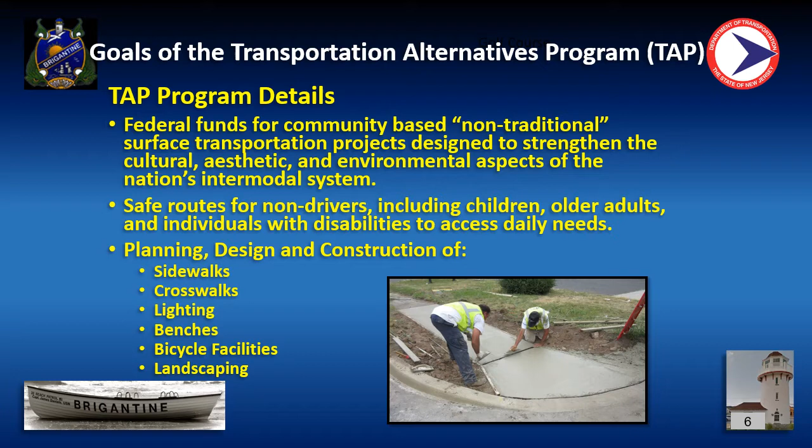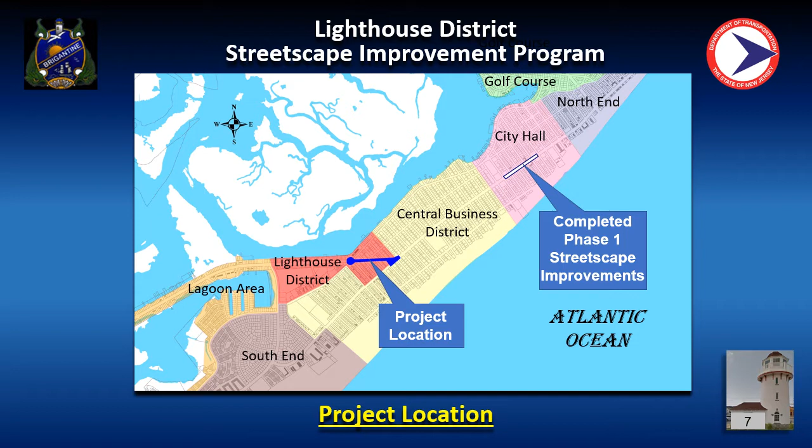Bayshore Avenue runs along the northwest side, or the bay side, of the island, and this roadway intersects Brigantine Boulevard at Lighthouse Circle. Brigantine Avenue runs along the southeast, or the ocean side, of the island and meets Brigantine Boulevard at a triangular-shaped intersection near 30th Street. That's where everything ties together.

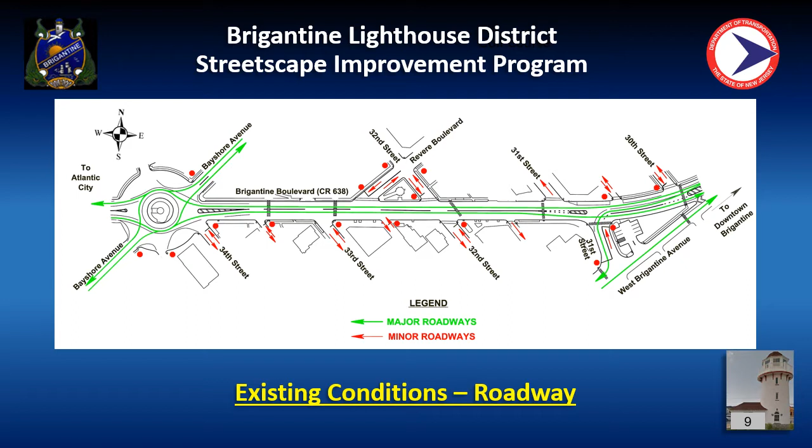Brigantine Avenue has bike lanes in both the northeast and the southwest of Brigantine Boulevard. The bicycle lanes currently do not extend along Brigantine Boulevard through the project area.

The major and minor roadways through the project area typically have sidewalks along both sides of the road, and crosswalks across Brigantine Boulevard are provided at 5 different locations, and this provides excellent pedestrian connectivity through the project area.

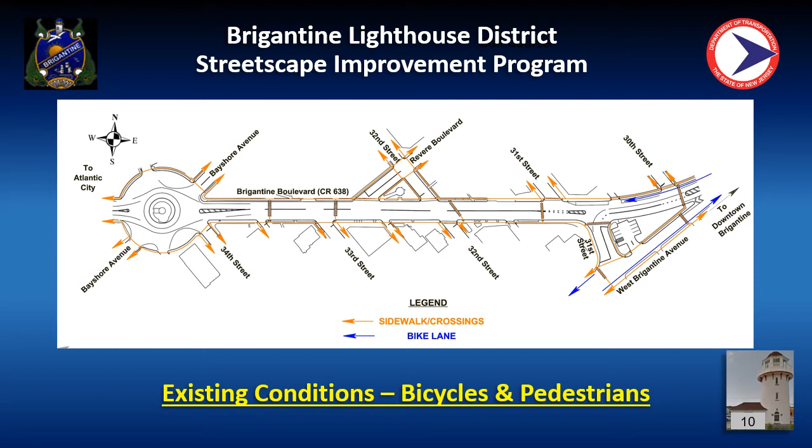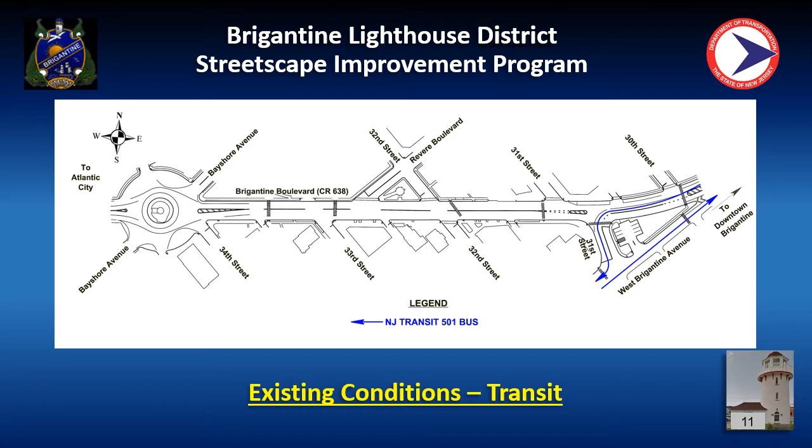The New Jersey Transit 501 bus runs the length of Brigantine and connects to Atlantic City. The bus route runs along Brigantine Avenue through the east end of the project area. The route has stops at 28th Street and 32nd Street in both the eastbound and westbound direction. The NJ Transit schedule also shows a stop at 30th Street in the eastbound direction; however, there's no sign showing the location of this stop. It'll be right about here.

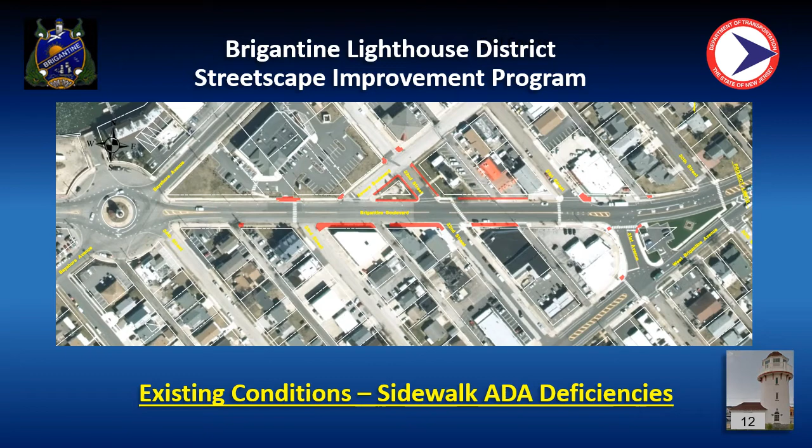The New Jersey Department of Environmental Protection, or NJDEP, regulates many activities in many areas within the state. For example, NJDEP regulates flood hazard areas, which are lands with a high risk of flooding. The entire project area is within a flood hazard area, where the 100-year flood elevation is 9 feet, and elevations within the project area vary between 3.5 and 7 feet. The entire project area is also within the Coastal Area Facilities Review Act, or CAFRA zone. NJDEP also regulates certain activities within a CAFRA zone.

The proposed improvements will have minimal environmental impact. The project team will determine whether the improvements require NJDEP review and will apply for permit approval during final design if it's required.

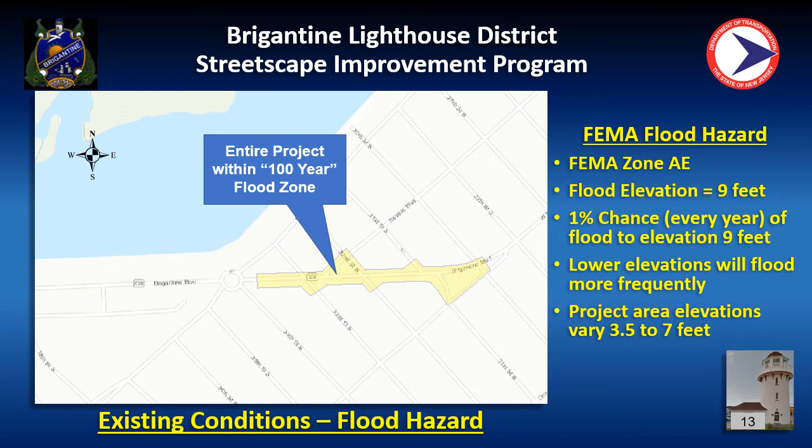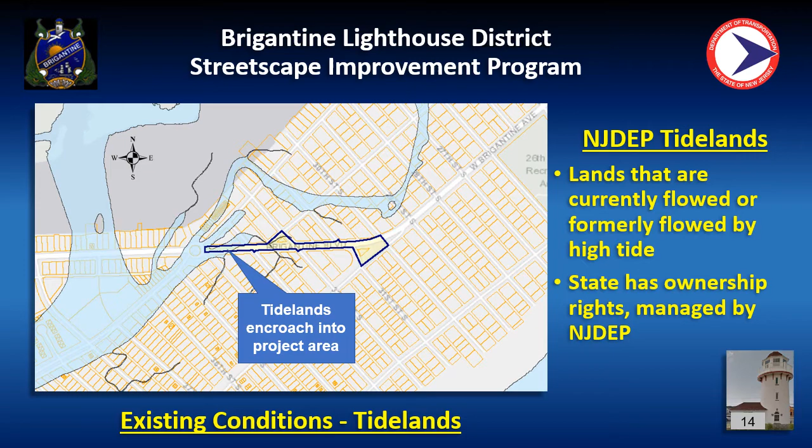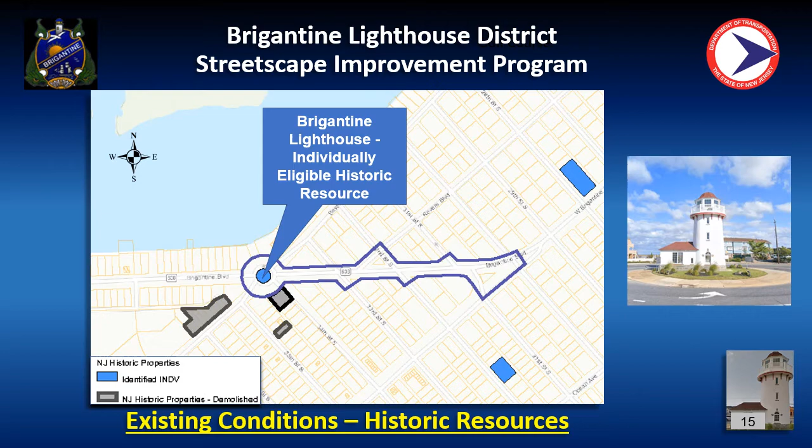The New Jersey Historic Preservation Office maintains a GIS online map viewer of the state's cultural resources inventory. The mapping application is called LUCY, which stands for Look Up Cultural Resources Yourself. The LUCY maps identify one existing cultural resource, the Brigantine Lighthouse, which is eligible for the state and federal registers of historic places. And of course, that resource is located right here in the middle of the circle, immediately adjacent to our project area.

Since this project will receive FHWA funding, the project will comply with federal requirements for minimizing impacts to historic resources, which is referred to as the Section 106 process. NJDOT will lead the Section 106 process, which includes the following: it starts with initiation, establishing the proposed improvements, and that's where we are right now. Also identifying historic resources, and so far we've identified one resource, the Brigantine Lighthouse. This is followed by assessing and resolving adverse impacts, if there are any. And throughout these steps, public input or consultation is requested, and everybody's invited to participate.

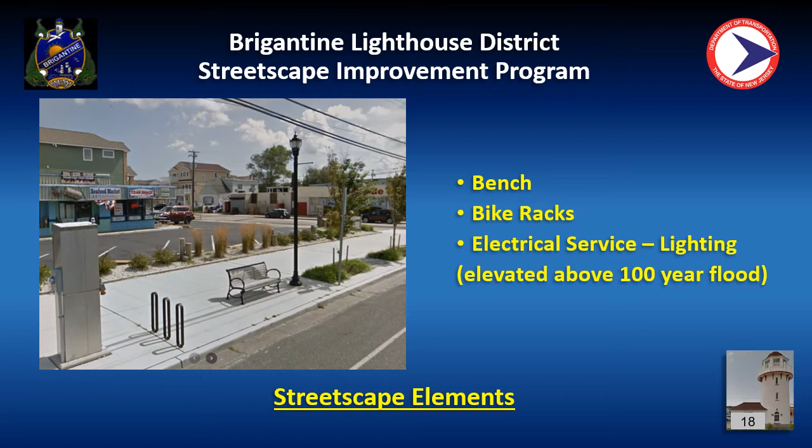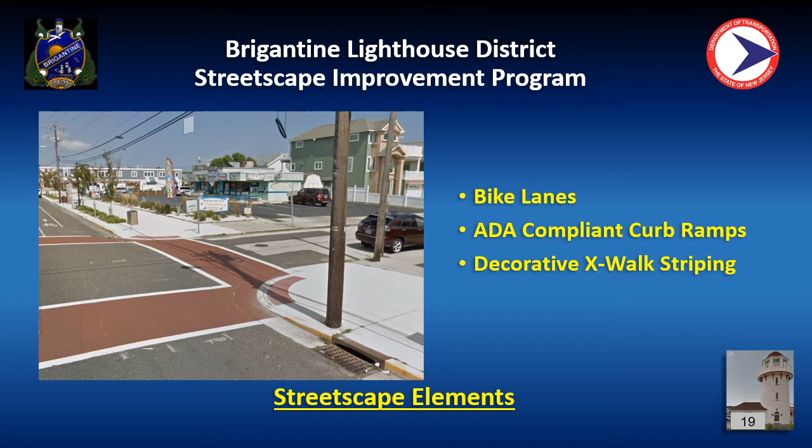Now let's look at the proposed streetscape improvements. The proposed measures are designed to improve the urban environment and better accommodate alternative users and alternative transportation modes. Streetscape improvements include various elements, including decorative lighting, landscaping, permeable pavers, and trash receptacles, benches, bike racks. Here's electrical service, and note the meter cabinet has been elevated above the 100-year flood. Bike lanes, ADA compliant curb ramps, and decorative crosswalk striping.

Landscaping is a significant part of the proposed improvements, with environmental benefits such as providing shade, reducing runoff, and improving the quality of the air and water, along with creating a natural and inviting space to encourage people to engage in social interaction.

Proposed street trees include white crepe myrtle and green vase zelkova, which will visually frame the project corridor, softening the viewshed and creating a visual definition between the roadway pavement and pedestrian areas. Ground covers include lily turf and dwarf fountain grass, which will fill in the planting beds and provide pedestrian level plantings. Now, this landscaping scheme is identical to the landscaping along Brigantine Avenue in the City Hall district, and would provide consistency between the two streetscaped areas.

Now, the project team would be open to suggestions for alternative plants if the Lighthouse District community wants landscaping that provides a contrast to the streetscape improvements in other parts of Brigantine. Any suggestions for landscaping alternatives should be provided to the project team on the survey form, which is available on the Brigantine website.

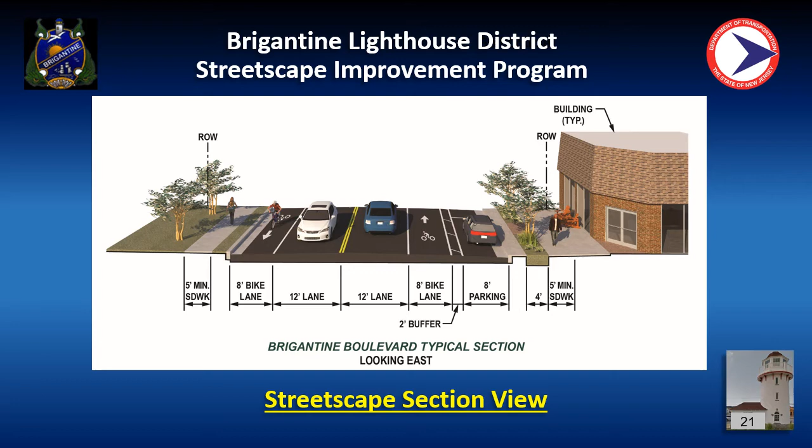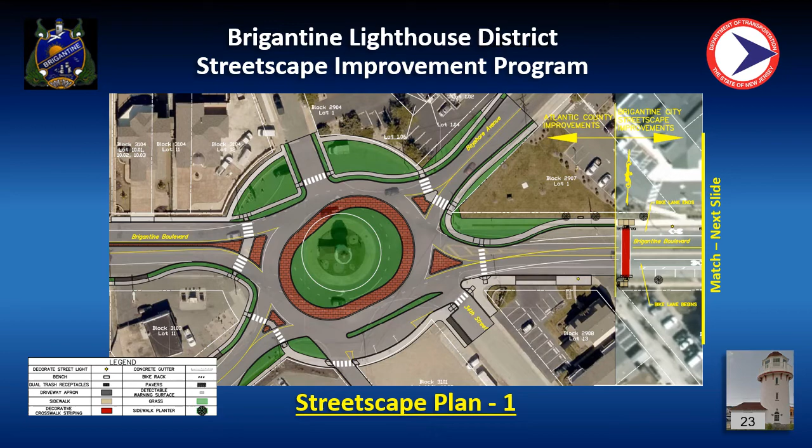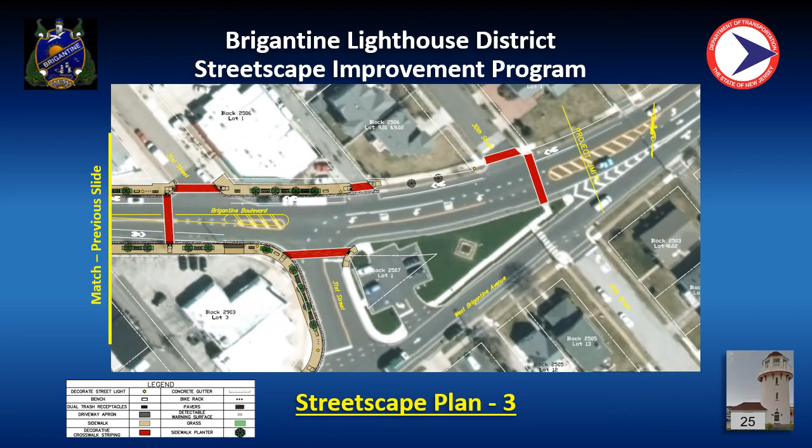The proposed streetscape improvements will provide the following benefits. They'll improve mobility for the young, the elderly, and disabled, encourage alternative transportation modes, provide health and quality of life benefits, reduce runoff and pollution, and provide shade. It will invite access to the district and to businesses, which should spur local economic activity, incentivize business investment, and increase property values.

Of course, these improvements will not be free, and there will be costs and impacts. For instance, the estimated cost is about $1 million, and this will be reimbursed through the federal TAP program. To construct the proposed improvements, workers will likely need temporary access to adjacent properties to tie in new sidewalk and driveway pavement. Temporary construction easements will be required for most adjacent property owners.

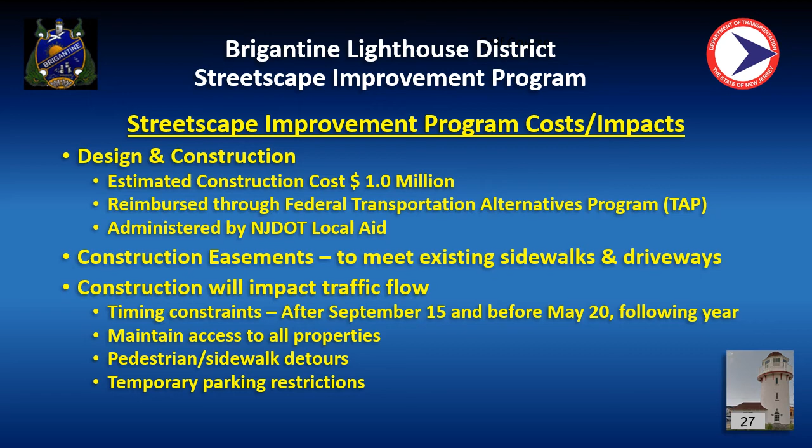These easements would be temporary, as permanent right-of-way acquisition is not anticipated. During construction, the contractor will need to close portions of the roadway and sidewalk to provide room for workers and equipment to get the job done. Planned contract measures to reduce community impacts include timing constraints, where construction or at least lane closures and sidewalk closures would not be initiated until after September and would be buttoned up before the end of May, before Memorial Day. Requirements to maintain access to all properties at all times. If sidewalks do need to be closed, detours will be provided. And of course, there will be some temporary parking restrictions.

The project is currently in the preliminary engineering or PE phase. Remaining activities in preliminary engineering include completing the public involvement process, finalizing the PE report, and preparing the environmental documents, which will be a categorical exclusion document or CED, and the cultural resources study as part of the 106 process. NJDOT is tasked with preparing the environmental documents. We hope to complete preliminary engineering and start final design before the end of the year 2020.